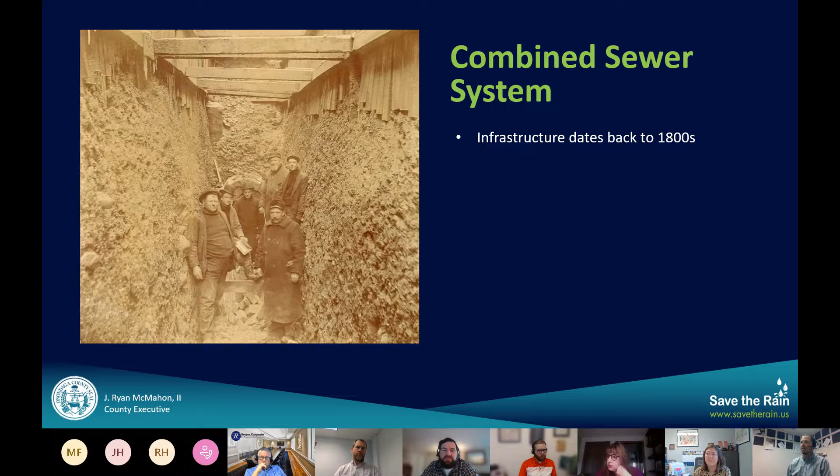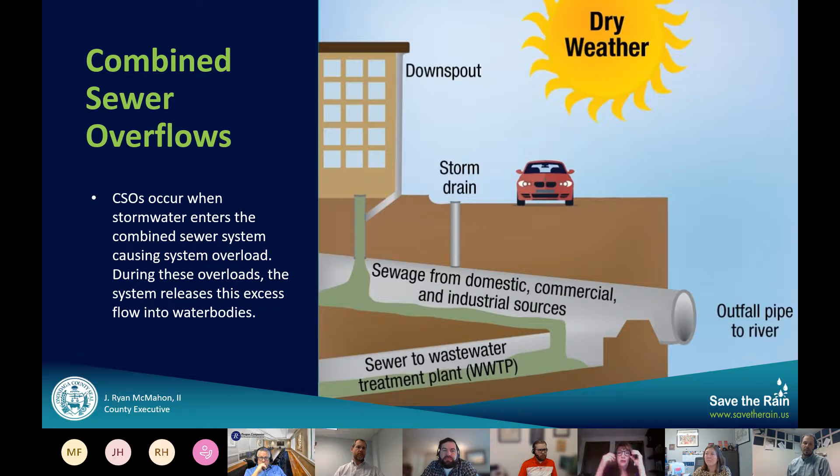The interceptor sewers were really meant to only convey low level flow, dry weather flow, to the wastewater treatment plants. But during a rain event, the interceptor sewers would be overwhelmed with the amount of water, and they would then overflow into the creek. This was standard business for a long, long time in how cities were built, including our city. These overflows are allowable as far as regulations are concerned; we just need to control how it happens and how frequently it happens.

On Walton Street, the way it works is from Clinton to Franklin, towards the creek, we have a combined sewer storm pipe that runs towards the creek, and then there's an overflow point — like a bump in the road for the sewer — and then all of the low flows turn the corner twice and head back towards the Franklin Street intersection. This is exactly what happens on Walton Street at CSO 29. Currently, a quarter-inch of rain causes a combined sewer overflow on Walton Street. The sewer shed is pretty small — it's just Walton Street, the four blocks that are around, from Clinton to the creek.

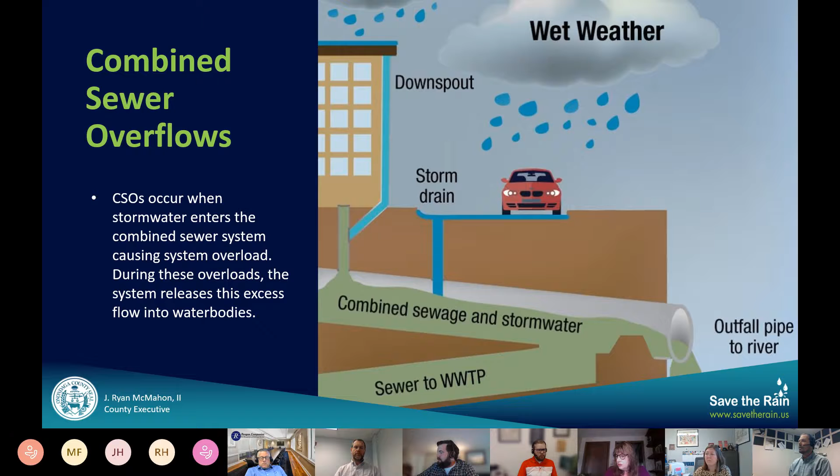So this is what we have here in the city of Syracuse: a combined sewer system. We've been underway for a little while addressing combined sewer overflows, but combined sewage is untreated raw sewage going out to Onondaga Lake and the tributaries, specifically Onondaga Creek, right underneath the Walton Street Bridge.

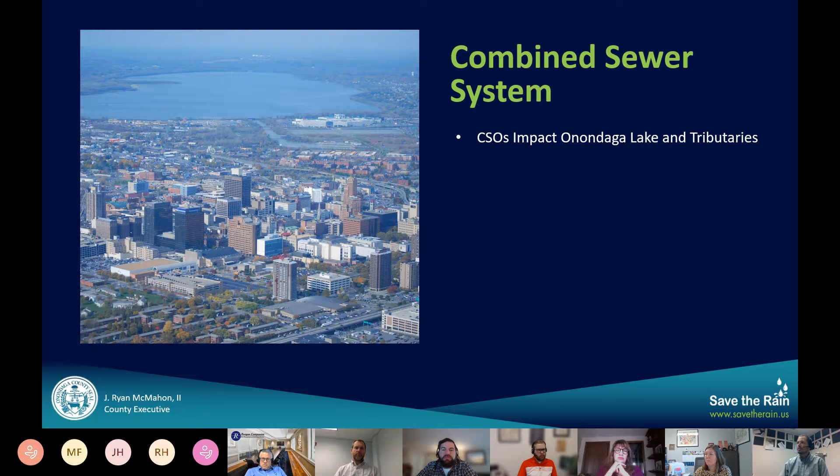We have been working on addressing combined sewer overflows in Onondaga County since the late 80s, and settled in 2009 on a combined approach of green infrastructure and gray infrastructure to abate combined sewer overflow and get rainwater out of the system. Green infrastructure is one type of technology, and gray infrastructure is another type of technology to address the rainwater and overflow issues. I'll talk about what that means and how we did it here.

Gray infrastructure is exactly what it sounds like. It's pipes and wastewater treatment plants to take combined sewage or sewage and address it so that dirty water is now able to be swimmable water. All of our effluent from our wastewater treatment plant, and improvements we've had there, are addressed through gray infrastructure. We've also done some other modifications in our program.

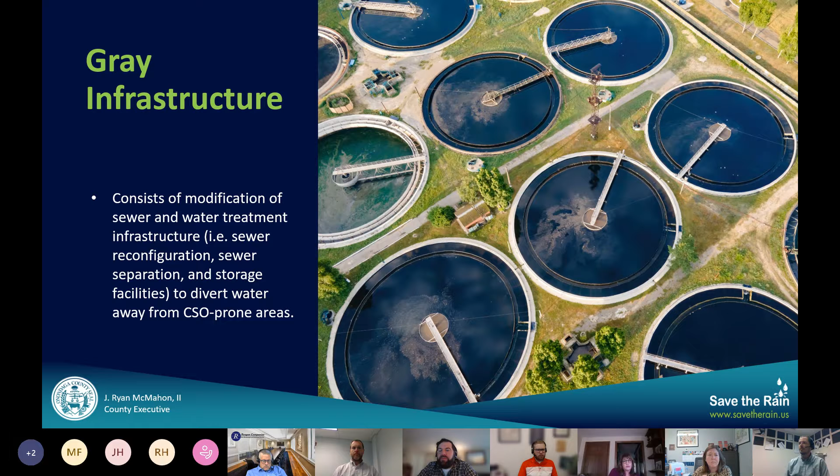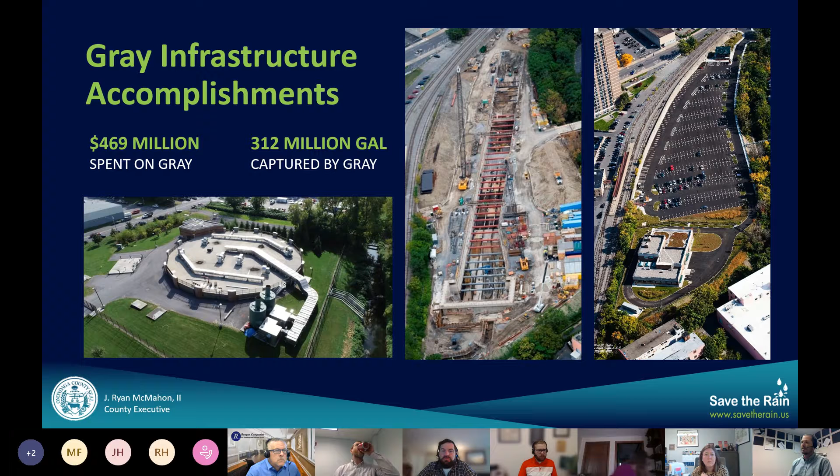So we did a handful of these larger scale gray infrastructure projects. We spent $469 million to capture 312 million gallons. That wasn't just capture here—on the next slide, we also made significant improvements at the Metro wastewater treatment plant and improved the process there.

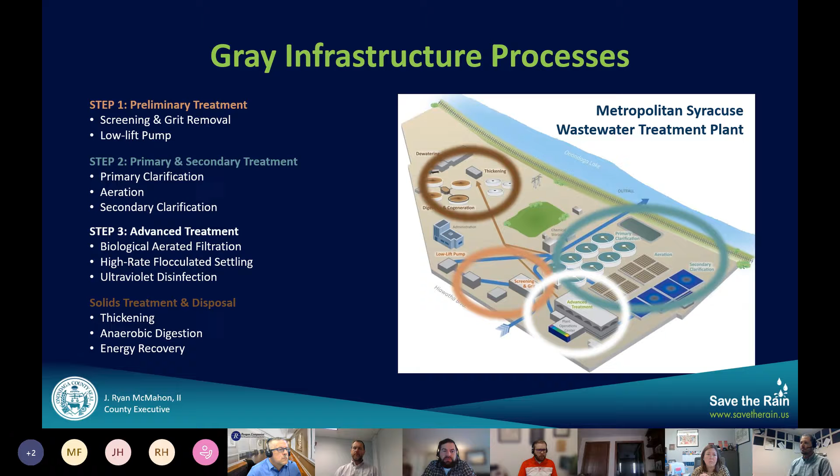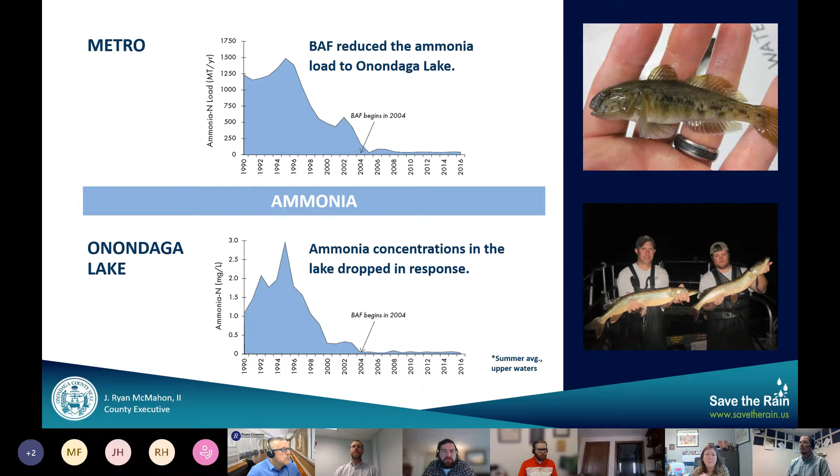When we turned on the BAF, we reduced ammonia in the lake and had significant impacts on fish life. The next slide is advanced treatment for phosphorus—we brought that on, and it reduced algal blooms in Onondaga Lake and also had a positive impact on aquatic life in the lake. So big improvements at Metro, and amazing water improvements in Onondaga Lake because of it.

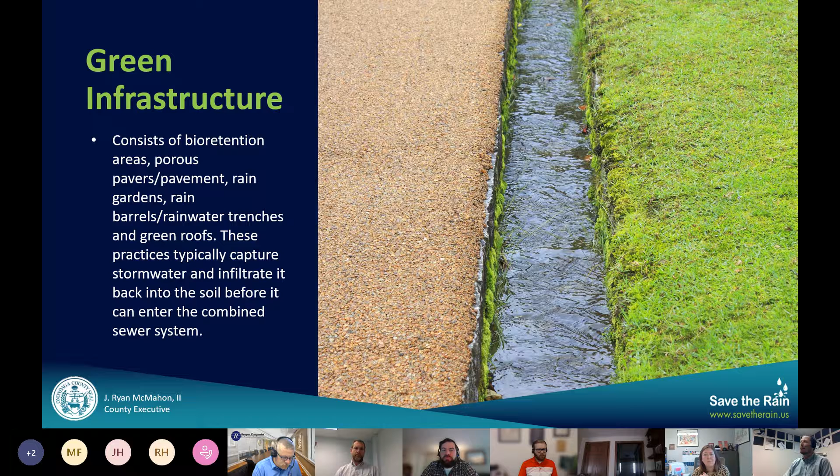Green infrastructure is typically what you'll see Save the Rain doing, and what we're kind of known for—and why the landscape architect works for the sewer department—because we have bioretention areas, porous pavers, rain gardens, green roofs, bioswales, and all these sorts of technologies that get the rain out of the system and into the ground. We either infiltrate it or slowly release it back into the sewers to shave the peak, as we call it, so we have less overflow.

We've spent not quite as much as on the gray side, but we've captured a whole lot in gallons, and those gallons are out of the system. You've seen us at Leavenworth Barker Park or the Hughes Magnet School on the right. We've done a lot of projects—225 projects around the city—that we have installed and work towards maintaining.

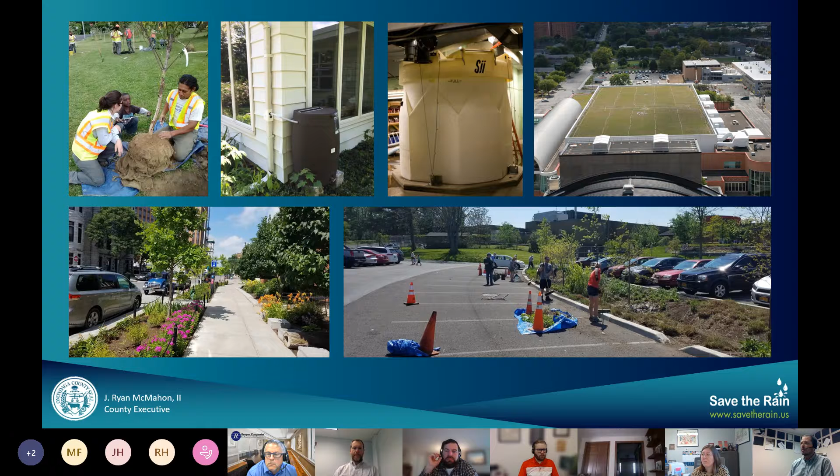This is typically what you would see us doing. There's our OnCenter green roof and Water Street on the bottom left. The picture on the bottom right is the zoo. These are some great examples of what you'd typically see the Save the Rain program doing under green infrastructure, but this project is more of a gray infrastructure project because of the location.

So really quick project overview: this is only a couple of streets, a couple of blocks in the area of CSO 29. We really looked at how we can reduce combined sewer overflows in the area, and because of the density of these two blocks, the amount of utilities under the ground, and the amount of basements under the ground, we really didn't see green infrastructure as a solution for reducing combined sewer overflows here, just because of how the area was built.

So we still needed to reduce combined sewer overflows in the area, and we were looking at a gray infrastructure project to meet that solution. This will provide benefits to the creek, the lake, and also reduce combined sewer overflows right here in downtown, which will also have positive net benefits on the downtown business district.

So that's kind of the big program overview—where we are to date and where we are going with the project. We've been working on this for a little while; I'm not going to spend a lot of time on where we've been. The guys are going to talk about the value engineering evaluation we did in '21, but importantly, the next slide will show you where we're going.

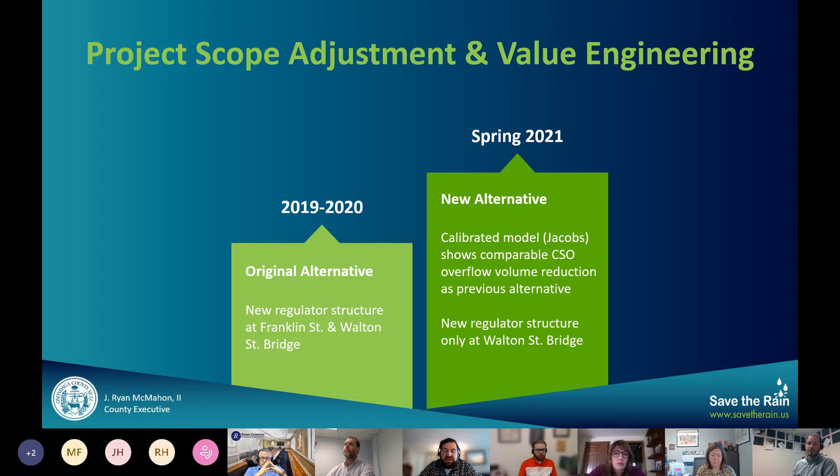Thank you, Adam, for that introduction and the background on the county's Save the Rain program. As Adam said, we did an alternatives evaluation, and we're going to present the current project scope and the major project elements here.

The major project elements are to replace the regulator structure. This is the structure that controls the CSO overflows to Onondaga Creek, and it's adjacent to the Walton Street Bridge. In that regulator structure, we're going to raise and widen the weir, which is the control point that regulates flow in the county's system. It sends flow back to the main interceptor sewer, and also regulates flow that overtops the weir and goes to the Onondaga Creek. We're going to replace the adjacent piping in and out of this manhole structure, and there's also a manhole near the regulator structure that we'll replace as well.

We're going to improve the sidewalk, the ADA ramps, and make asphalt improvements to the street in the area of the Onondaga Creek walk and the bridge location.

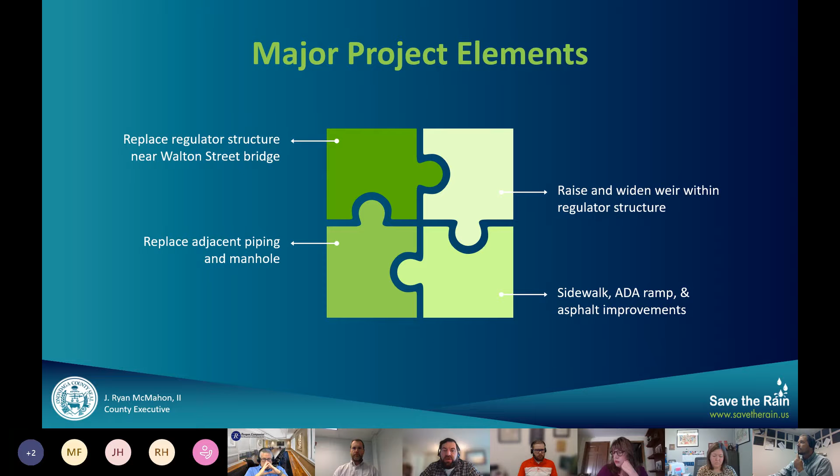Just to go over some figures of the project area: this is the overall site plan currently. As I stated, the work is going to be near the Walton Street Bridge. You can see the creek walk and the area where it crosses Walton Street here. The yellow line is a temporary chain link construction fence that will be erected, and the red line is the construction boundary, showing the impacts here. There will be a security guard on site to check in visitors.

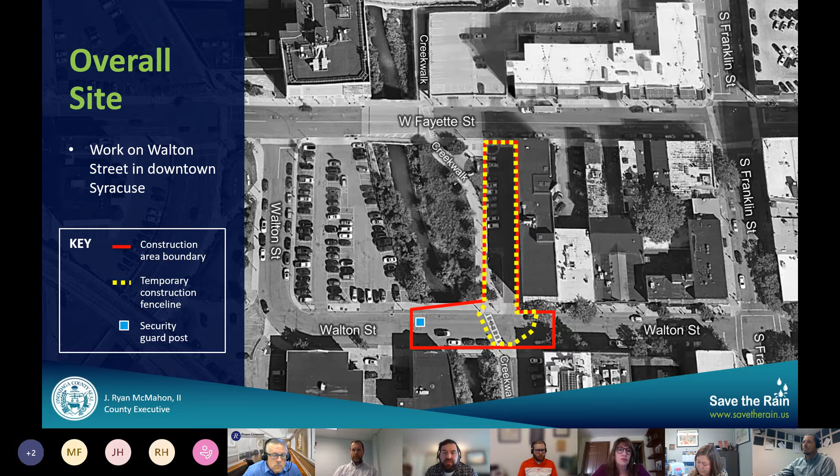Ben, can you go back one slide just a second? I just want to point out that there is that parking area between Walton Street and Fayette Street that we will be using for the contractor to store equipment and materials, and to access the site. Next slide.

So this new regulator structure is designed to be 10-foot diameter, completely underground. As I said prior, we'll have new piping to and from this regulator structure, and we'll also be replacing manhole 2, as it's called here, just to the north of the regulator structure.

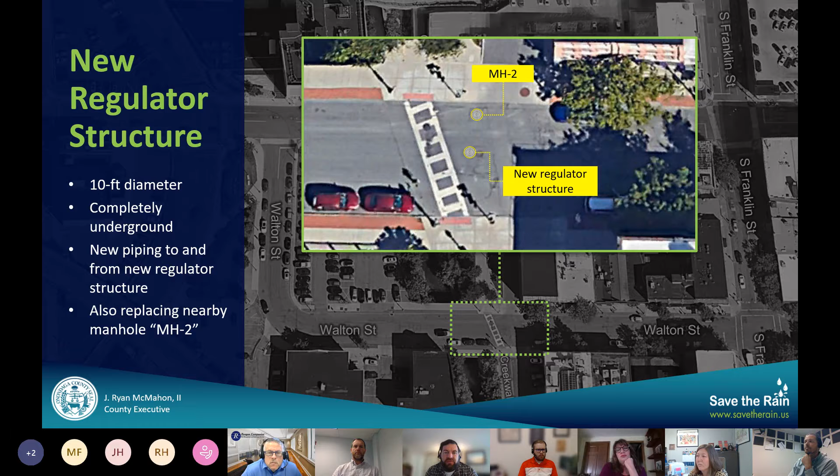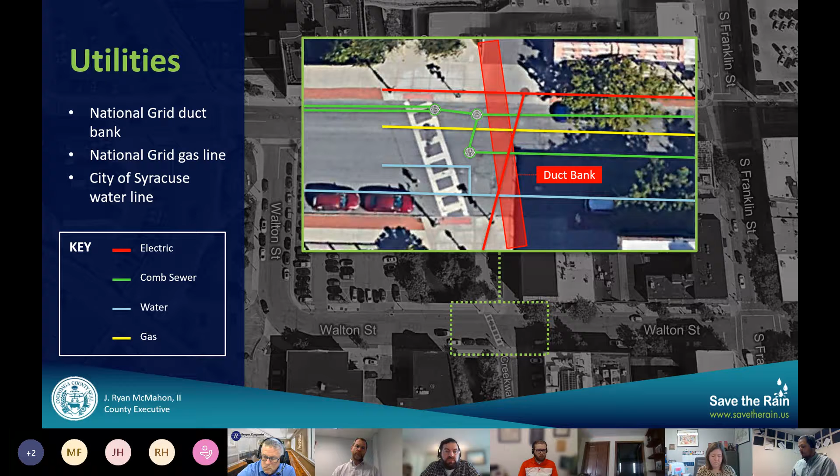So there are some utilities underground that we've taken a close look at, and we've spoken to the utility purveyors, National Grid and City of Syracuse Water, so they're well aware of the project. There's an electrical duct bank that runs parallel to the creek walk - that's the heavy, thick red line running north-south. There's also some miscellaneous electrical for street lighting. The yellow line is a gas line that runs along Walton and terminates at the bridge, so it's a one-way gas line. The green line represents the combined sewers.

There is only the one water line that runs east-west along the curb line of Walton Street, so that will be protected in place. There is one blow-off water connection that we'll be looking at closely and relocating to have space for this regulator structure. This is our current engineering drawing showing the regulator structure and the new manhole 2 to the north.

As Adam said previously, the flow comes down Walton Street from east to west and returns via manhole 2, then the sewer runs back to the Franklin Street intersection, which intercepts the main interceptor sewer that takes the flow to Metro. So that's the flow path, as Adam said prior on the figure there.

So we are doing our best here—the intent is to protect that electrical duct bank in place with no interruption of service, as well as the gas line itself.

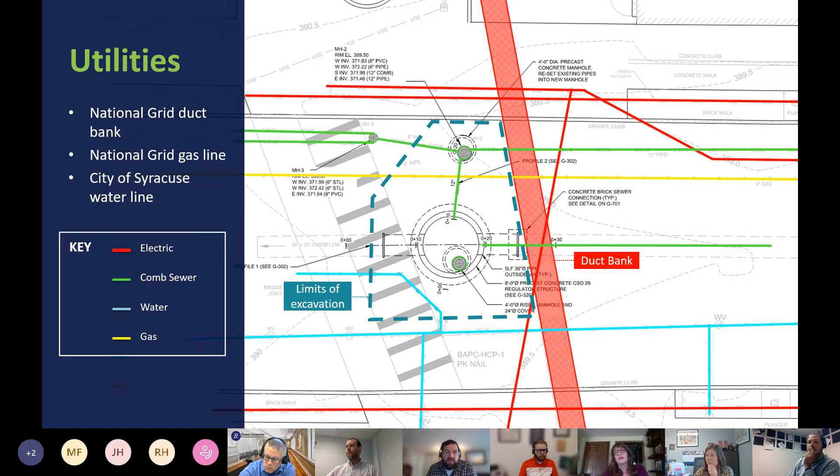The next 8 weeks will be demolition of the existing sewer system and existing manhole, installing a helical pile system. The soils here are pretty poor condition adjacent to the creek, so we need a small pile system to support this new regulator structure, and then the actual installation of the manhole and piping in this 8-week period.

I'm sorry to interrupt you—just for reference, for folks here who are unaware, when people hear piles, I think the first thing they think of is...

So if you could just explain briefly what helical piles are and why we're using them—essentially we can avoid that. Yes, a helical pile is essentially a screw, if you will. It's installed by a machine that drills the pile into the ground, so there's no noise, no hammering, no vibrations. The piles are installed that way and then filled in with a grout material that gives them rigidity in the center to support, in this case, the new manhole structure above it.

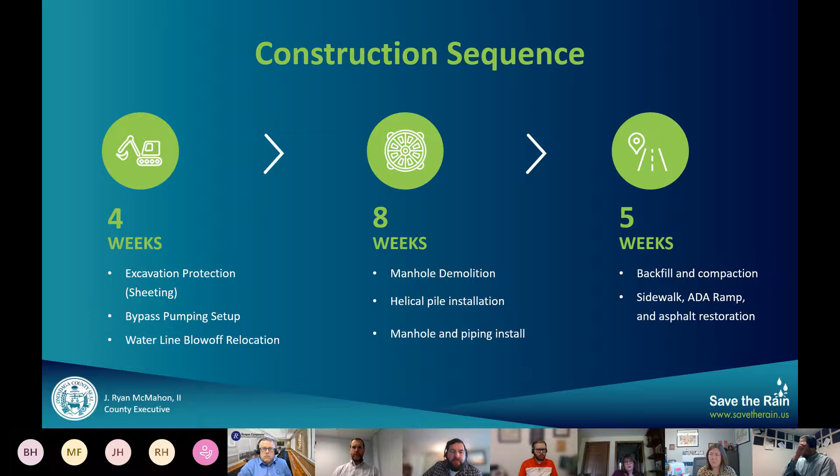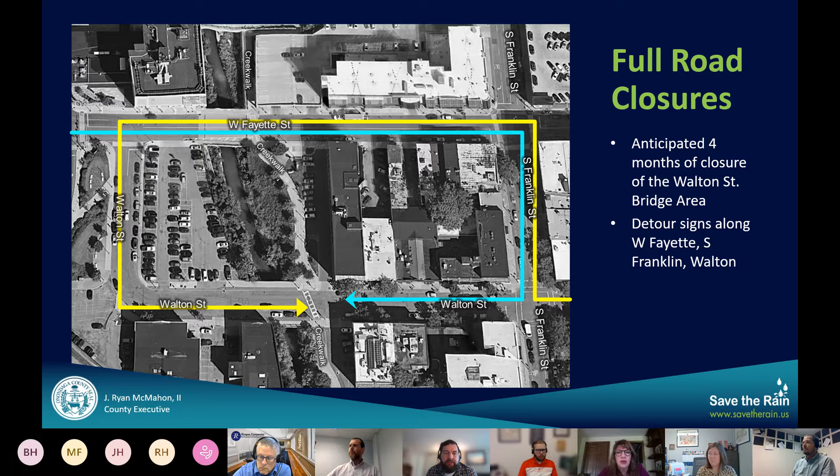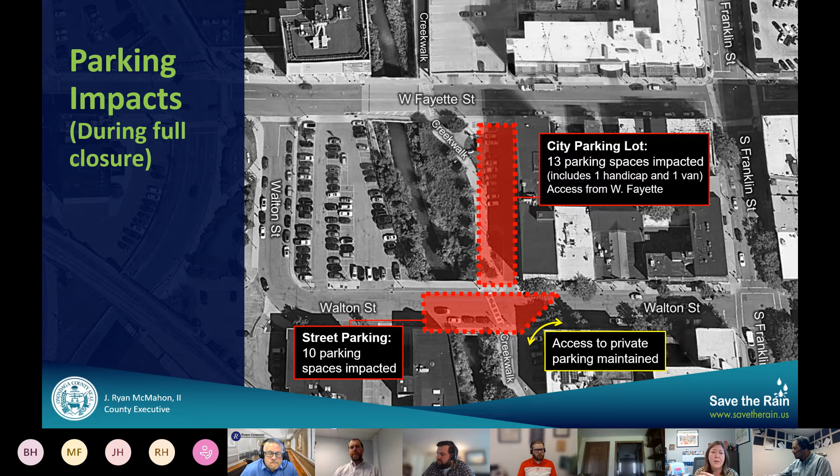And then the last question I have is with the sidewalk path you'd shown, I think in the previous slide, maybe the path where people go, right by where Urban Outfitters used to be, and then right into the front of where Vagabond Clothing is located. Will a temporary crosswalk be striped, or a path created to allow pedestrians to easily access the north side of that block?

Yes, both on the west and east sides will be where we'll be routing that foot traffic. We will have temporary crosswalks constructed.

Thank you, and speaking to your comments about the parking, we will absolutely continue our relationship with you and the downtown committee. If we encounter any problems, or determine there are more efficient solutions between now and the commencement of construction, we'll happily explore that with you. We'd be happy to do so.

And I believe there was one other element to the parking I'm forgetting. It might have been the contractor, a subcontractor. Yes, site cleanliness. That's absolutely one of our foremost concerns.

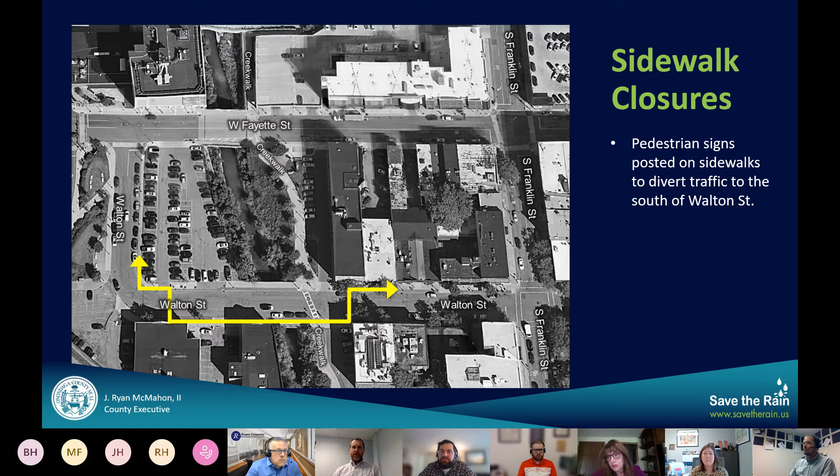Absolutely, we're always there to work with you, and we'll keep a close eye on the progress. We will have, I think we mentioned before, not in this meeting, 24-hour surveillance. We'll have a guard booth, so we'll have eyes on the scene at all times, alert to not only security risks but health and safety risks as well.

Does anyone have anything else? Oh, I believe we've got a question from Timothy. He's had his hand up for quite a while, so please go ahead. And if you could, just unmute. Just waiting my turn here. America, yeah, sorry about that.

Thank you. That's okay. America, am I to understand you're with the downtown committee? I moved downtown about three years ago. You guys do a wonderful job. I love the emailed newsletters, I wouldn't have known about this meeting without it. So thank you very much for what you guys do.

So backing that up, I live at 211 West Jefferson, the Sugarman Law Firm building, about a block away, so this will have a pretty heavy impact on my life. My question is, why aren't we replacing the water lines when the road's all torn up, since that's one of the biggest problems with the city of Syracuse, the deteriorating infrastructure of the water lines?

That's a great question, I can take that one. When we had a bigger impact on Walton Street, we actually went to a pretty good extent and have been coordinating with the city of Syracuse about replacing water lines in the area where we were working. The water lines in this area where we're working, we will upgrade as needed and as possible. So it's not that we haven't coordinated with the city, we are coordinating with them.

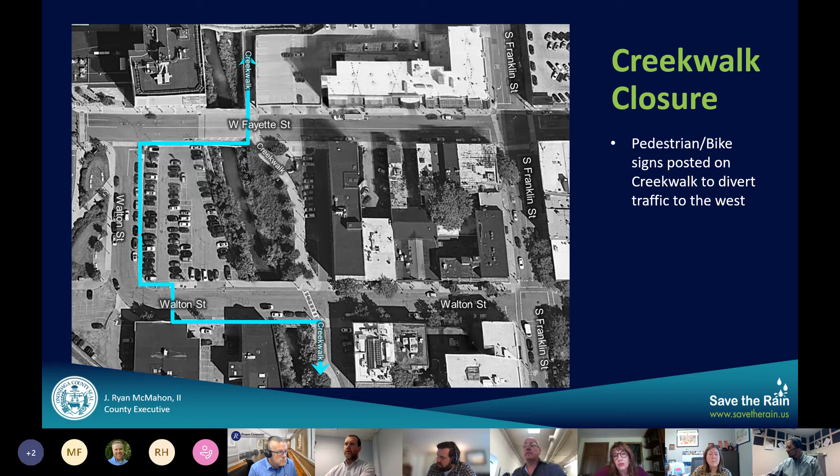One is in terms of the road being open on Walton Street, how do you anticipate turnaround? You've got people parking on those streets and delivery trucks coming in, facing 2 different directions. How are they going to turn around? How do they get out of there? What's the egress to that street?

That was a comment city engineering had also made, and we're going to carefully measure those distances and establish that we do in fact have enough clearance. I don't know if Arcadis has done any work on that, any measurements or logistics sorted out, but I'll let Ben speak to that. I think the comment from city engineering was that it might be worth just having parking on one side of Walton. That would give ample room for vehicles to turn around. So I think that's one thing we need to consider.

If that is what we do, it has a significant impact on parking. Whether we would restrict it to just one turnaround point at the end, try to limit it as much as possible, not necessarily all on one side of the whole block. But that question was raised by engineering. Adam and I were just down on site the other day scoping it out. I'm not sure how much of an issue it will be, but we will look at it very closely.